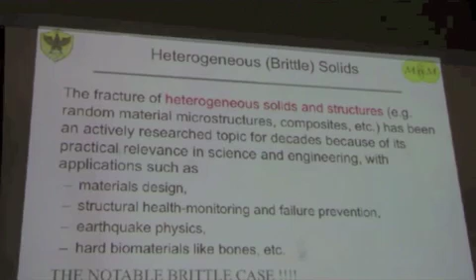The topic is heterogeneous brittle solids. This is a follow-up talk to a few remarks I made a couple of years ago, the last time we met in Cisterna with a small subgroup of this audience.

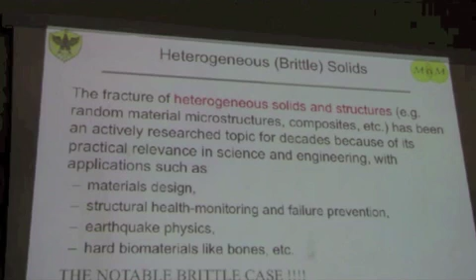Essentially, heterogeneous solids and structures are materials that have a random microstructure, and this is an actively researched topic because these are brittle materials.

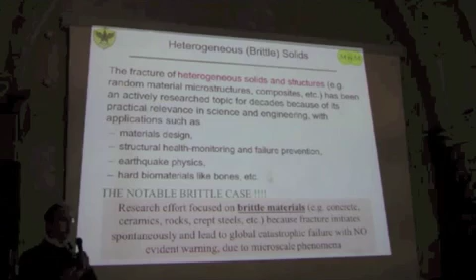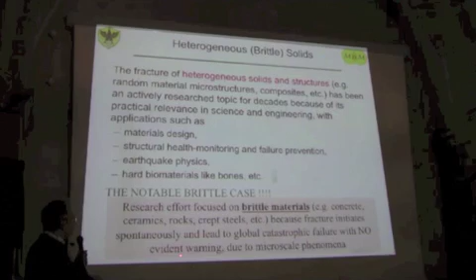These are materials that fracture following an initiation process. Even if there is no previous damage, we have an initiation process, then an evolution with the formation of several microcracks that nucleate and then cooperate together to determine a localization and a global catastrophic failure with no evident warning usually.

So we have a macroscopic effect, failure, driven essentially by microscale phenomena. So bottom-up, or essentially discrete microscale approaches, are natural approaches.

This remark is perfectly in line with Professor Kyriakides. This morning he said, 'I'm a discrete guy.' I'm not going that far as to say that I am a discrete mechanics person, but this is probably the part of mechanics I have explored most.

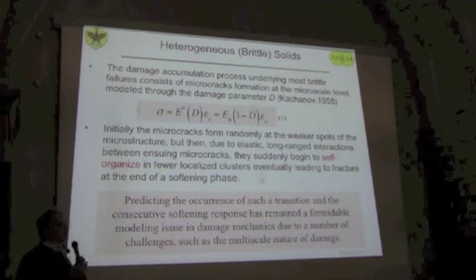Now let's take the simple 1D damage model due to Kachanov. He introduced that in the context of creep, but then this model had tremendous success, and of course it's a scalar model with all the limitations and all the benefits that come with it.

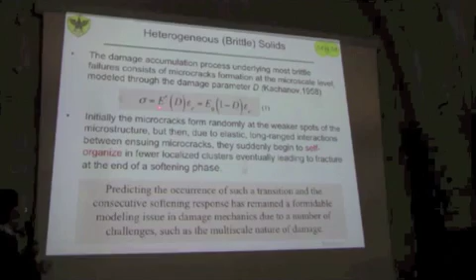This is seemingly simple. However, how we determine the damage parameter that really describes the complexity of any damage process is really absolutely non-trivial.

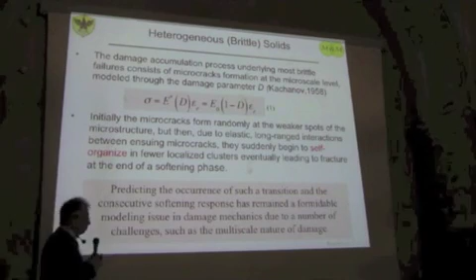I'm going to go real fast in the first part so that I can set the stage, and then spend a few minutes on the continuum part so that I tune myself more with the audience.

Now, when we deal with the discrete microstructure-based approach, we have to recognize that there are several length scales we can think about. We have a macroscopic length scale, then usually if we are able to model with a continuum at that scale, we can also define a representative volume element where we can average random properties, random fields, and random parameters.

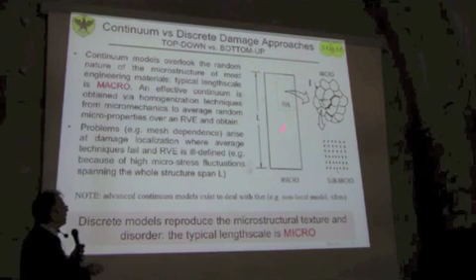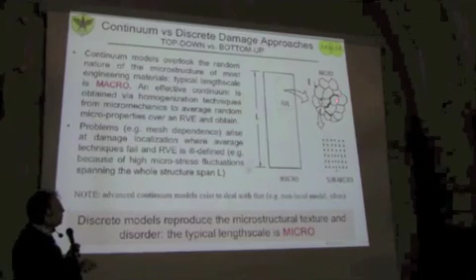Then if we zoom in, if we use a microscope to look into the material at a finer scale, we're able to discriminate the microstructure, for instance the polycrystalline structure of a polycrystalline material. Then you will see microcracks nucleating, submicron crack nucleation between grains. Then if you increase again your resolution, you go down to the atomic scale.

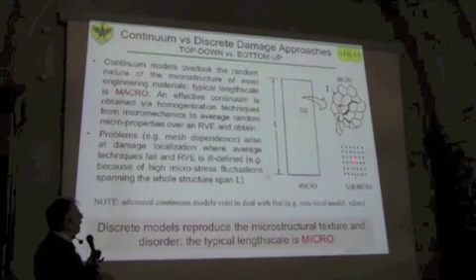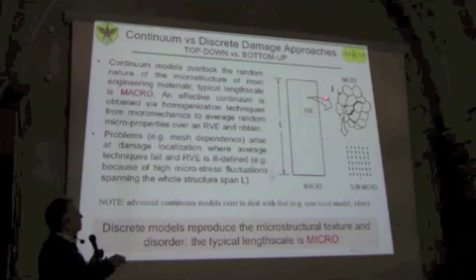Doesn't matter, let's say we play between these two length scales. So we need a macroscopic length scale, which is the structural sample dimension, then a microscopic length scale, which is, for instance in this cartoon, the grain size. Our objective is to establish the connection between discrete models of damage and suitable representative continuum models based on first and second gradient theories.

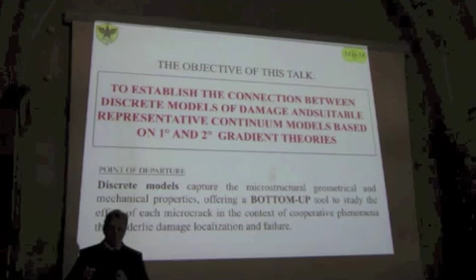Point of departure: discrete models capture the microstructural geometry and mechanical properties, offering a bottom-up tool to study the effect. So let's try to see what the physics is like at the finer scale, and then build a continuum model that is physically based, that respects the physics.

Background. Okay, I don't need to go back and forth. The simplest damage model is the fiber bundle model.

Probably most of you have seen this. It's a little bit more than an exercise, but it's an excellent starting point because for this type of system, where you have lots of N bars which are elastic, and they have some microstructural, microconstitutive law, and they are all connected together with a rigid bar, essentially you can come up with closed-form analytical solutions.

This is relevant so that you can get a clear picture of some of the things that happen at the micro scale, and then reflect on the macro scale.

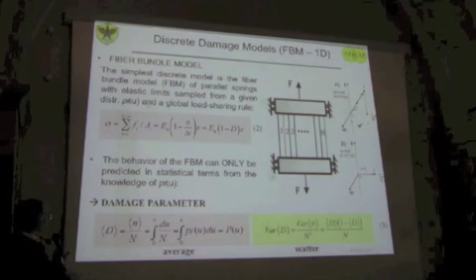Now, for instance, if we try to apply the Kachanov model, it takes this form, and essentially you immediately are able to derive the damage parameter, the mean damage parameter, as an integral of the distribution of the critical strain of these links. These links are simply elastic elements that at a certain point, at a certain threshold that is random, break down.

So what happens? You have a global sharing rule, so the load that is not essentially taken by the broken link gets redistributed evenly over the surviving links.

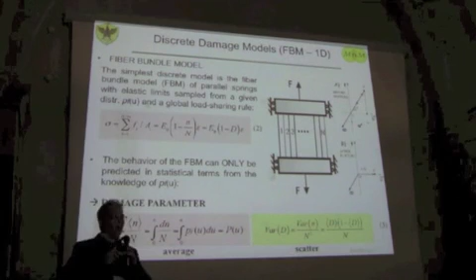Together with this, you just sample a critical distribution for any sampling distribution, and you come up with all sorts of damage parameters simply by integration. You can also calculate the variability of the response, because this is a random model. If I have a population of critical strain, I just sample n of them, and based on my sample I will have a certain evolution - mean response, average, but also scatter. This is nearly always neglected, especially amongst the continuum community. So average is fine, we will be talking about average behavior, but don't forget that there is also a scatter.

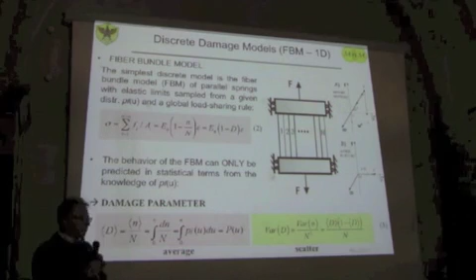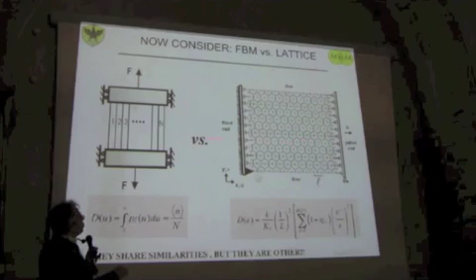Now, there are lots of systems where you really cannot stop with the 1D representation. Most material systems resemble a higher dimensional system, like this lattice, which simulates a polycrystalline material. And then there is an obvious complication that is evident from the definition of the damage parameter. This is what I just showed you, and what we will be discussing later on. You can see at a glance that it is much more complicated.

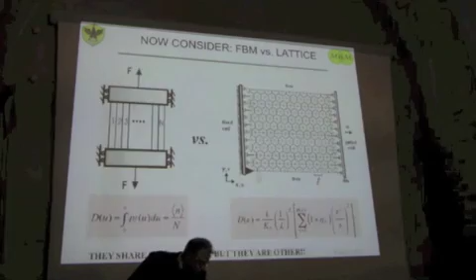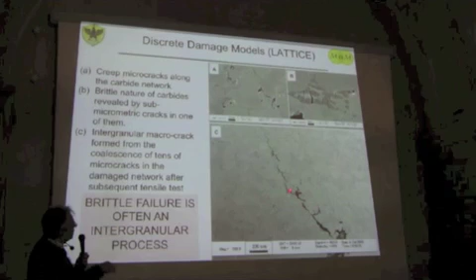So these are some examples of materials that can be described or simplified in terms of network descriptions. You can see definitely this network formed by the grain boundaries. These are just pictorial things that I'm throwing at you. You can see nanoscale cracks on brittle phases in multi-phase materials, and you can see cracks propagating through a polycrystalline material that has been embrittled by exposure and by creep deformation for 10 years at 900 degrees Celsius.

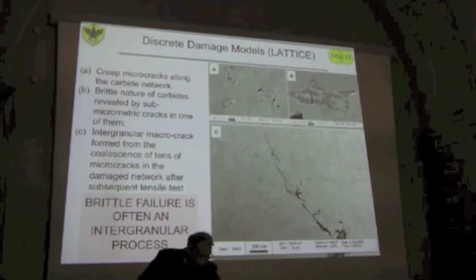So, let's say that from those material systems we can come up with a simplified representation that is a lattice based on typical Delaunay triangulation. Each grain gets associated, maps into a node in the lattice, and all grain boundaries map into links.

Now, when you simulate a tensile or compressive test on this system, you actually get this type of response, sigma epsilon, in stress-strain response. But now something very interesting happens.

If we try to understand why this comes about and how this relates to the microstructural properties, you have to look into microstructural quantities. And if you do simulations - and we actually wrote the code so we were able to control anything about this model, so it was a nice virtual lab - we were able to actually go and investigate properties.

As I please, you will see that as I apply a strain in a displacement-controlled simulation, I will induce the rupture of springs that can sustain strain of the same order only until a certain point. Then something happens - there is an explosion.

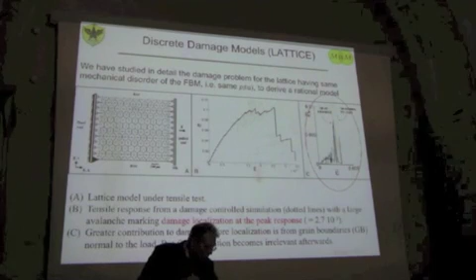When I approach the peak of the stress response, you see an explosion, and what happens essentially, there is a damage localization, energy localization, and springs that are very strong get broken, of course. There is an avalanche, and so the system experiences a transition from a homogeneous deformation to a localized deformation. I'm just saying things that several of the previous speakers already brought into the picture.

Now, let me point out something very interesting. In that specific lattice, you had some horizontal links that were aligned to the direction of the load, and then you had some diagonal ones. Then, if we check essentially the behavior independently of the horizontal link and the diagonal spring, what happens is this.

The links that are favorably oriented with the load tend to break at a faster pace, at a higher damage rate in the beginning - you see the red spots. This is perfectly normal, but it's also something that gives you a tremendous perspective about this phenomenon.

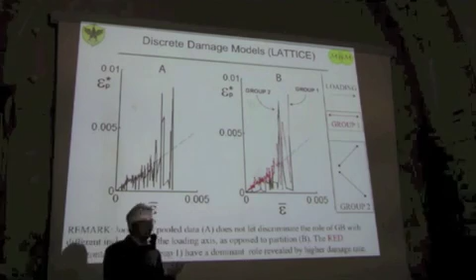Now, the diagonal ones essentially don't participate in the damage process until a certain point, where the damage rate increases and then explodes. Beyond this point, as I was saying, no matter if you are a diagonal or a parallel link, you will be part of an avalanche. There is no way the microstructure can stand the energy redistribution.

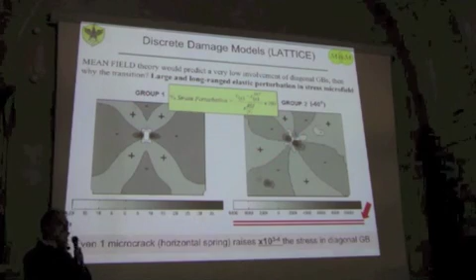Now, this is another interesting point. If we consider the nature of the building block of this process, it's really the fact that when I remove a link because there is a microcrack that nucleates into the microstructure - since the very first one, like in this case - you immediately have a perturbation, an elastic perturbation field that radiates over the domain. This is the effect of a microcrack forming on horizontal links. Now the test direction is this one, okay?

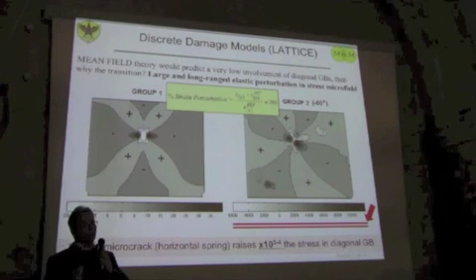Now if I go and check the same effect on diagonal links, you will see an increase of strain, elastic strain induced on the other surviving links, of 3 orders of magnitude. This means that even if something was oriented at an angle and would not withstand any load in a pristine configuration, as soon as I start removing links, they are invested by a perturbation field that actually loads them.

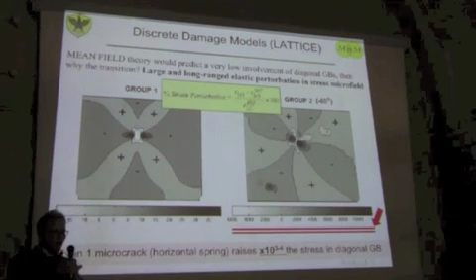This is why, over time, the diagonal links get involved into the process, and until they become so involved, they become dominant. When this happens, there is damage localization: clusters of microcracks nucleate together, and you actually have a macrocrack propagating through.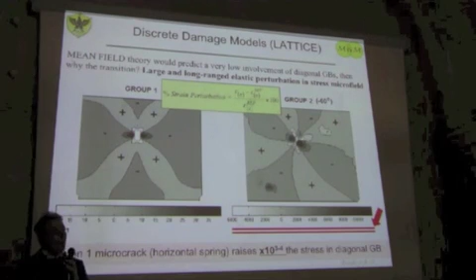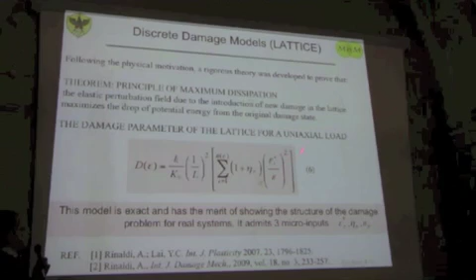So this is really the point I mentioned already a couple of years ago, this is where we were. This is the rational damage model for that lattice, work that has been done by me and some co-workers up to 2008 or so, and it's really the counterpart of the fiber bundle model.

Let me point out that there are 3 random quantities that enter in this model: the number of broken bonds, and for each broken bond a parameter eta, which is a redistribution parameter, and the microstrain of the link that broke, the critical strain of that link.

Why am I saying this? Because this is a nice mathematical tool, a reference point for us to reason, but it's very difficult in practice to know these quantities. So why am I going to seek continuum representations? Because I want to overcome these difficulties. I want to see if I can make educated guesses, some assumptions that let me use, instead of these hidden parameters, some more manageable quantities that I can measure from experiments, for instance from digital image correlation.

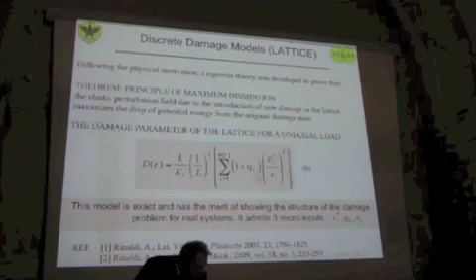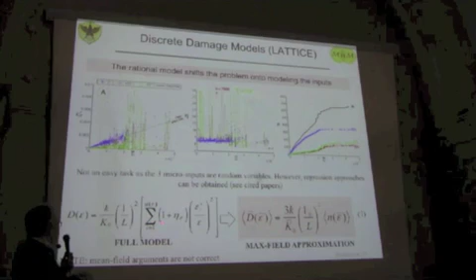So those 3 parameters are highly random fields, and only if you know them can you actually compute these quantities and really compute exactly what the damage parameter is.

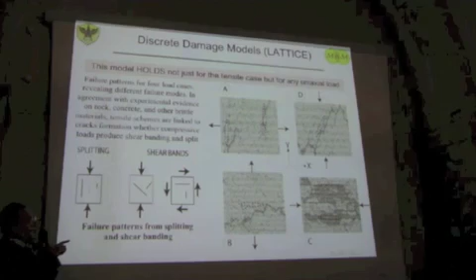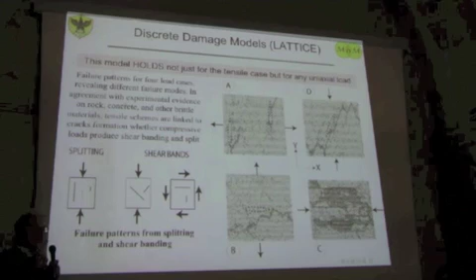And of course, if you're able to track the system, the phenomena, and measure those quantities throughout the damage evolution, you will be able to predict nicely the behavior of the lattice, not only for tension but also compression, and not only in X but also on Y, because this lattice is not really isotropic, it has an anisotropy.

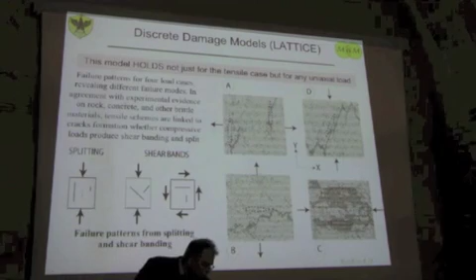It's isotropic only in pristine state, because the hexagonal lattice maps into an isotropic continuum. This is well known. But as soon as you introduce one defect, you induce an elastic anisotropy, a damage-induced elastic anisotropy.

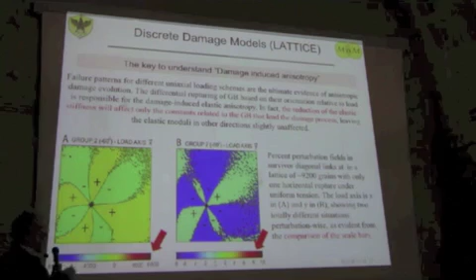So again, if we check the importance of a single microcrack, when I pull in one direction versus the other, the effects on the lattice are completely different. I'll be able to discuss any of these aspects with you later on.

Let me go a little bit fast because this is just introduction. So we had fiber bundle models, then the two-dimensional model, which is representative of higher dimensional systems. Now let's examine the continuum approximation.

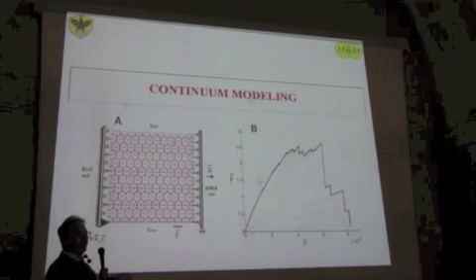Okay, this is our lattice, and this is our force response. You can see there are snapbacks, which are essentially instability effects. I think Professor Kyriakides had an entire talk based on this type of phenomena.

Now, specifically, let's look at this type of data. This is the stress strain response. The simulation results are the black line. The red line is the rational model I was just mentioning. Then the damage.

Hello? Doesn't work. Whatever.

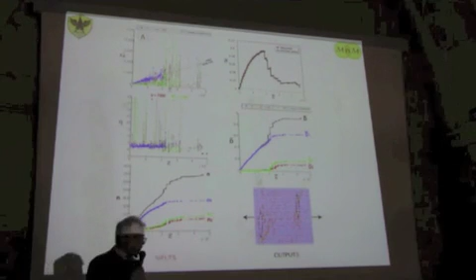Okay, the damage parameter is down there. This is the failure path. And over here, I have the inputs that I need to use for the rational model.

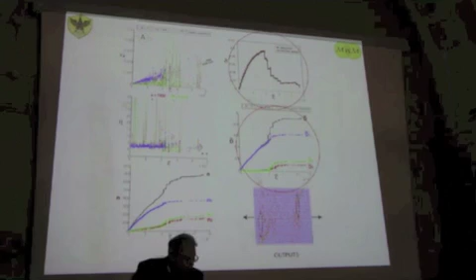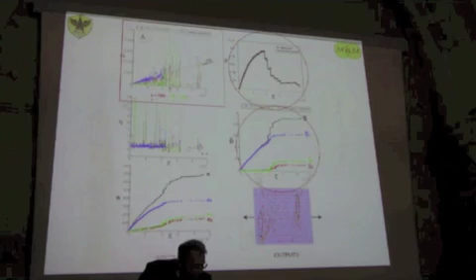Now, have a look at the stress strain curve, because it's what we really want to simulate, and also the damage parameter, which has to enter in the Kachanov's model. This is really what I'm going to draw your attention to, because I want to model that input. It's tremendously complicated, and if I manage to do that, I'll succeed.

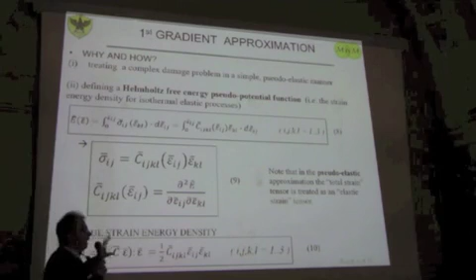Okay, I'll go fast. The first gradient model is very easy. If I can come up with a Helmholtz free energy pseudo-potential, I'm able to match the results nicely, analytically.

Basically, you can do this. This is something that Professor Del Piero has done. What I've done is this.

I have tried to... Works? Yes. Okay, thank you.

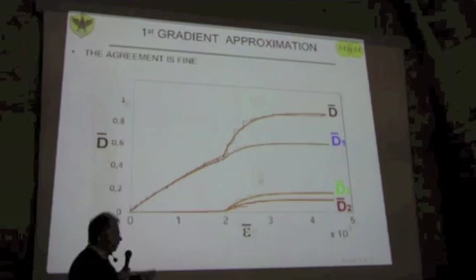I have fitted this model to the damage parameter for each type of grain boundary or link that I have in the microstructure, and that model that I picked works nicely, and there is a meaning to it.

Then, of course, something is missing there. Okay, there is the...

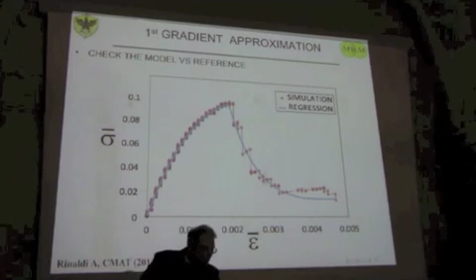So this is actually essentially the results. You can do it, no problem, it's an exercise, first order model, no problem. Now, second order model, just follow me here one minute.

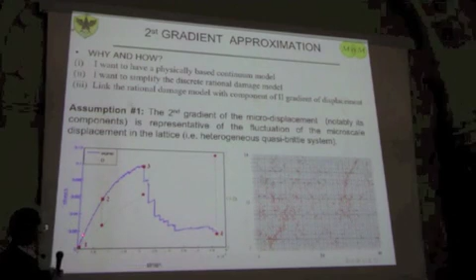This is the response. I'm going to check 4 points. This is a grid where I actually measure the strain field with the digital image correlation technique. I'm going to show you what happens in the beginning when I have no damage, when I have some damage, when I am at the peak, and when I am at the failure.

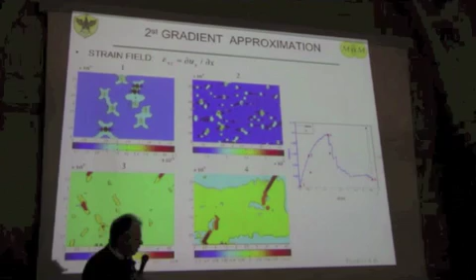You can definitely see that the displacement field reveals the whole story. Then I'm checking the strain, so the first derivative, the first gradient, and then the second gradient.

And the key idea in this is, can the second gradient of the displacement convey the information about the stress fluctuation, so the critical strain of the grain boundary, the inner strength of the microstructure?

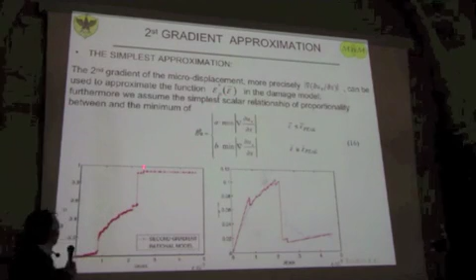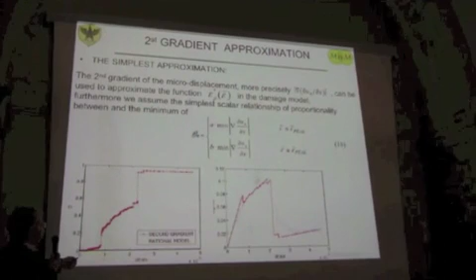If I take this field, the answer is actually promising, because if I make this assumption, this is the problem here. So the critical strain in my model is approximated as proportional, with a constant, with the minimum of the modulus of the field, of a component of the second gradient field.

It's not bad because this is a rough approximation. Of course, there is a huge correlation. I'm gonna close pretty soon.

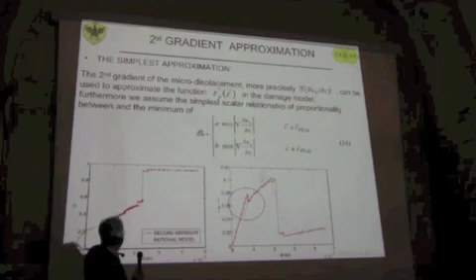Now I make, however, there is still some problem because I have this problem here for small damage density. So what I do, I just make a different approximation for small strain.

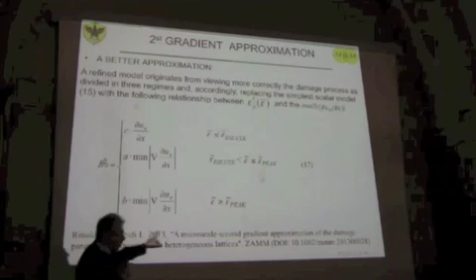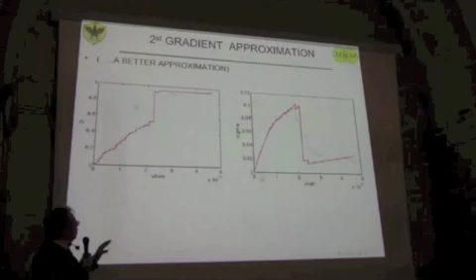And essentially, I come up with this model, and I stop here just to show that by using a second gradient displacement, so I'm throwing it inside my rational model, now I have a continuum quantity that I can measure experimentally, and I have enormously simplified my model, and I have an approximated model that actually matches the simulation results pretty nicely. So there is definitely now a continuum

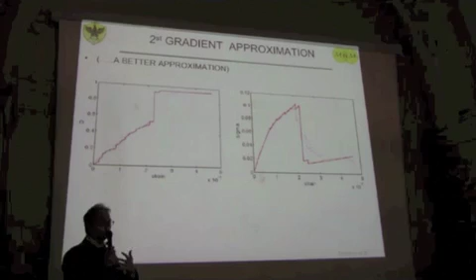counterpart that is physically based to the rational model. Let me see if I have to say something meaningful here. Something meaningful is this, probably.

This research direction essentially is driven by the fact that we should be able to derive models that are useful for technological purposes. So digital image correlation is a non-contact full field strain measurement system. So let's use it.

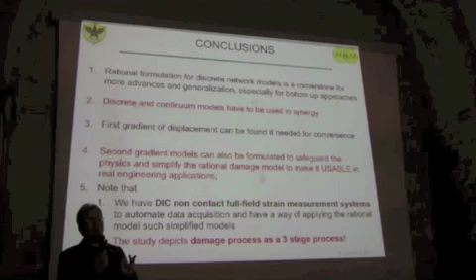Now it's essentially, we have it absolutely on a routine base. The other thing is this. Through this exercise, I have realized now that the damage problem is not really a two-stage process. It's not really nucleation and propagation.

But it's more like nucleation in a dilute regime, nucleation in a cross-talking regime, but still homogeneous over the entire lattice domain, and then there is the propagation.

And this is of practical importance, because if you are worrying about early warnings in these catastrophic sensitive systems, this is very key, so that we know where we should go and check for critical warning signal. Sorry for having been a little bit long.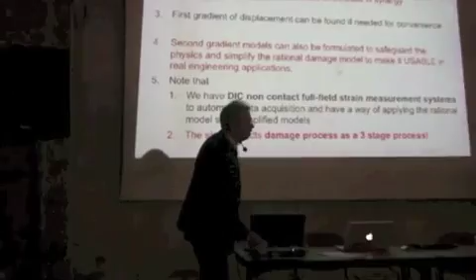I have not seen how you propose damage on second gradient. Essentially, I have substituted, I have replaced one of the quantities on the random field in the discrete model with a second gradient related quantity.

And essentially, this is a continuous quantity now. The model itself, it's rather trivial to actually have an entire continuum model.

Of course, there is all sorts, there is hundreds, thousands of papers where they actually have local sharing rules. Now, it really depends on what type of statistics you embed inside, what you were mentioning. I may not be aware exactly of their work, but I have seen it in all sorts of flavor, and the key is really what type of disorder you put inside and what type of interaction you enforce between neighboring links. But this is mostly like a textbook example for me.